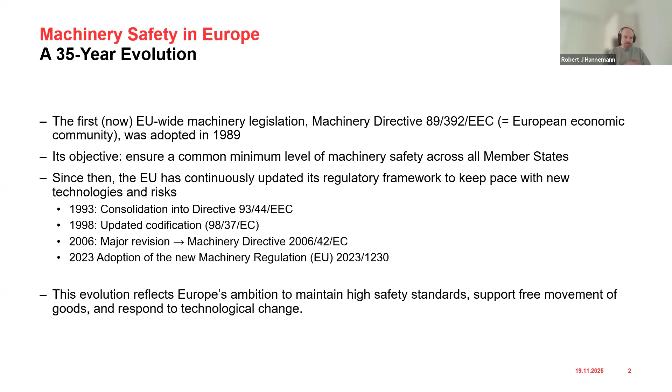We see an impact in the numbers. Since the 1990s, the fatal work accidents significantly got down. So we are in a downward trend since then, even though, of course, the machinery got more complex. The safety standards got up, but on the other side, the complexity of machinery was increasing heavily. I will show you a little later what machinery was like in 2006, but if you look at what has changed in the last 5 or 6 years, you can see that the complexity of our world and the complexity of the economy is way higher than it was.

But still, fatal accidents have been dropping since the 1990s almost continuously. In the last decade, it was declining by 10 to 15%, depending on which numbers you take into account. And this is, of course, one of the main reasons: we have harmonized standards, we have modern standards, they have been revised all the time, they have been adapted, and we have also a higher level of technical documentation. The whole life cycle has been addressed, so machinery has to be safe in the whole life cycle, and still we have 3,000 fatal accidents across the European Union every year. So there's still a lot of things to do.

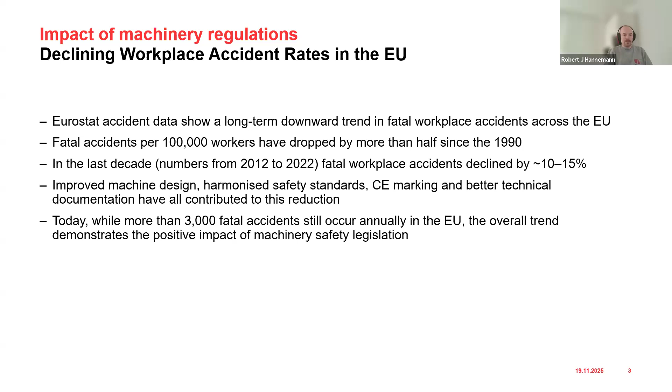And so often we are the ones that get blamed, that processes become more complex, that they cannot work as they used to. But still, our approach is that everybody goes home safe. Maybe they can hate us when they go home, but they go home safe. This is what our job is about, in my opinion. And every life that is saved is one reason why we do what we do and why we love our profession.

So back in 2006, we had machinery, of course, but it was isolated. It was mostly offline, and we didn't have that many safety functions. And software had a very limited influence on safety, basically almost no influence at all. Everything was really isolated and offline. Functional safety as we know it today, so the IEC 61508 and the IEC 61511, they were just released. And as you know, when a standard gets released, until it's really in place, sometimes it's 2 years, sometimes it's 3 or 4 years. So the changes are very slowly going into everything. So in 2003, it was introduced. In 2005, this old machinery directive was basically finished. So there was not that much talking about functional safety as we do it now.

We had no connectivity, we had no mobile apps; basically the iPhone was introduced in 2007. So in 2006, remember what we had? We had very big mobile phones, and they were still getting smaller and not bigger as now. The screens were getting smaller because there was no internet on the phones yet. So the whole world was a completely different one.

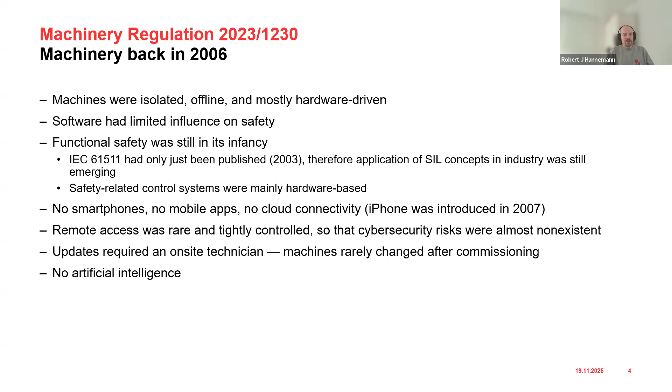Remote access options were tightly controlled, because basically they were non-existent. And cybersecurity for machinery, nobody talked about this. Maybe you were talking about a firewall for your home or for the ERP system of the company, but the machinery was not even connected to the internet. There were no updates, and no updates even necessary. And of course, there was no artificial intelligence. This has all just developed over basically the last 20 years. So this all was taken into account when they said, okay, we need a new legal framework. So we have the old rules, but the old rules.

Sorry, my headphone just restarted.

So the old rules that were applying for all this, they don't make any sense anymore for us now. And we need more options. We need more detail, especially into electrical engineering, into networking. And so they said, okay, we will do a complete new regulation, a new framework. So this was the main core.

Of course, in the meantime, we had some accidents that also had a very big impact. In 2022, a lot of wind turbines in Germany and I think Belgium and the Netherlands were basically spinning out of control because they lost connection to the servers, but they couldn't be stopped anymore. And there was no regulation that said, okay, if your machinery is driven remotely and it loses the connection, it has to go to a safe state. So something like this had a very big impact during the phase of writing this regulation.

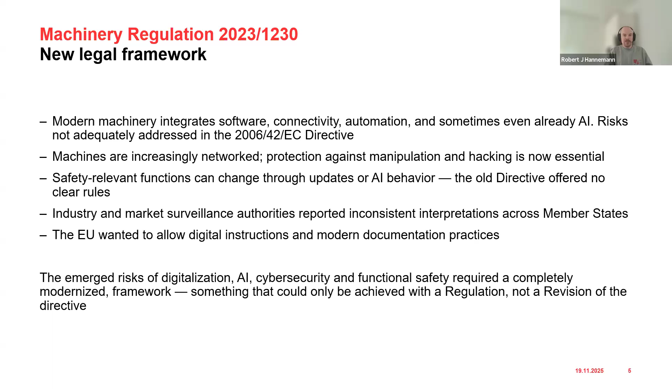And since we know that the technique in automation is changing very rapidly, we needed an approach that also gives the European Union the option to change and adapt very fast. This is why they did basically the regulation instead of a directive. So a regulation is immediately applied.

And every member state of the European Union, and for example Switzerland, which is not a member state of the European Union, we have to adapt to this, and we will take this one into account, and we have to adapt very, very fast also. But there is no vote for the parliaments of the member states anymore. So this will be basically valid from January 2027 on.

But the problem is, since there is the old machinery directive, now we have a regulation and a directive. And what was not possible was an overlap. So the new regulation will be valid in one moment, and up to then it's still the old directive, which also has a very big impact, of course, on the declaration of conformity of everything that is done with the manufacturing process, because all the old rules apply until this day, and from January 20 on, the new rules apply.

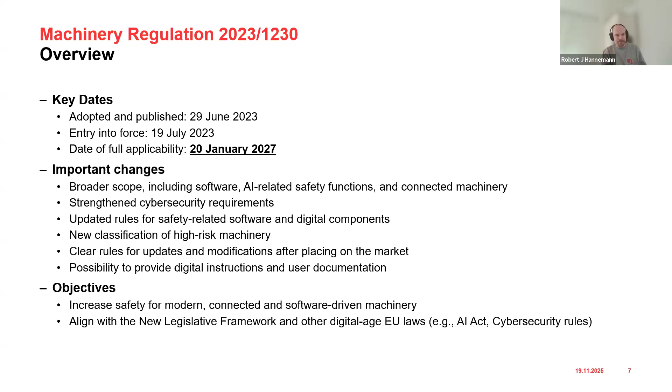So first of all, the definition of machinery stays mostly the same. The definition of machinery is basically mechanical equipment with actuators, control systems, interconnected parts, and at least one moving component. This is the most common one, and this stays exactly the same.

The problem is what was happening before, because there was a very little gap, and of course manufacturers used it, or there was a very big disadvantage for the operators, because if they sent you the full machine without the software, but the software was there on a USB stick, and you put it together, they could sell you the machine as incomplete and the software as incomplete, and you, as the one who connected everything together, were the one responsible for the declaration of conformity and for the whole conformity assessment.

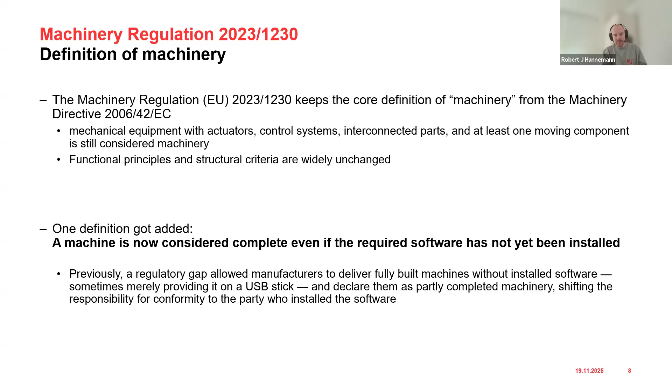And this is not possible anymore, because they added one definition, and so a machine is considered complete even if the required software has not yet been installed, which is very important. And this is one of the key changes inside of the definitions. So the responsibility, even though the software is maybe not on the machine yet, is still with the manufacturer and not with the operator or the one who builds everything up.

Second of all, we have a new approach for safety, or not. It's not completely new. It's improved, let's say it like this. So we still have this 3-step safety principle. So we have the design, technical measures, and then information for the guys who are operating it.

Safety has to be ensured over the whole lifetime of the machinery. So assembly, installation, operation, and so on, to dismantling, but also for partly completed machinery. Because if you had to do with this, you know that partly completed machinery basically just had two paper sheets, and that's basically what it was. Now they have to do a completely new approach, and it's very similar to what they have to do for machinery, but we will see.

So we have a much deeper integration of functional safety now. It is mentioned in the annex basically 20 to 40 times. So it has been adapted now since it was introduced in 2003, and we were working with this, and it was in the standards, yes, but it was not so deeply interconnected with the directive as it is now with the regulation.

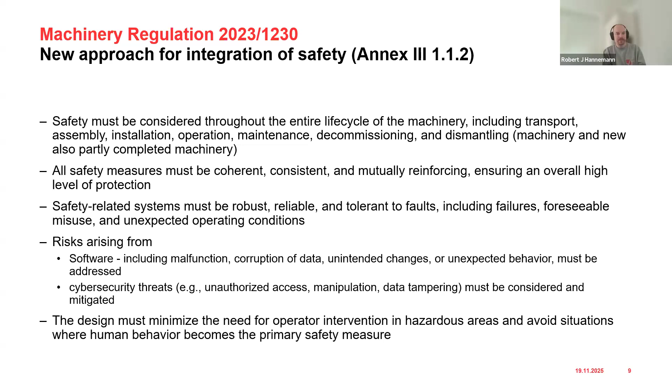What they did, the former Annex 4, this was the dangerous machines.

Sorry, I don't know why it keeps restarting. I think because I don't hear anything anymore.

But the categorization of machinery. So we always had the high class, the machinery which is basically high risk, and the machinery which is no risk or low risk. Basically, it stayed the same. We have new classifications, but this is something that you will hear and see in broader schooling, and you can read this in the directive.

For you, basically important to know is that the list of dangerous machines went from Annex 4 to Annex 1, and it can be changed. Because the directive never could be changed, since every member state basically had their own law for it, it was almost impossible to change the high risk machines. Now they can change it. The Commission can change it. And so if technology is evolving, maybe at some point we can get rid of some of the machines that we now consider as high risk.

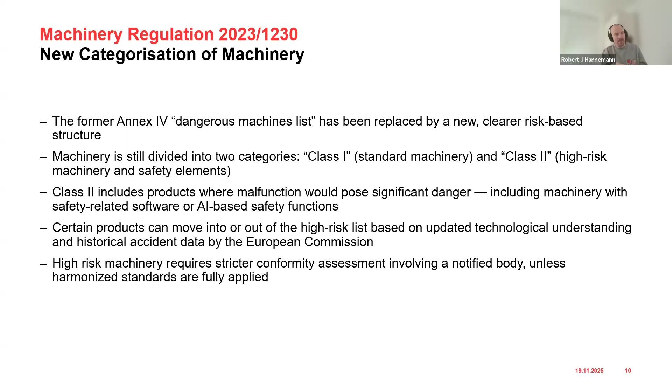And on the other hand, if some new technology comes to the market, we can, if it needs to, integrate it in the high risk machinery, which always needs a notified body or some other third party inside of the certification process.

For partly completed machinery, as I told you already, there are basically the biggest changes. So first of all, when you were building partly completed machinery, it had to be safe, but you could say which requirements of the old directive you did not fulfill. Now, every relevant health and safety requirement has to be fulfilled also for partly completed machinery.

And the manufacturers basically have to do the same technical documentation that they have to do for full machinery, also for partly completed machinery. So there is kind of a manual, there is signing on it. So it still has to be identifiable, because up to 2027, partly completed machinery had not even a type sign nor anything. Or there was at least no obligation to do it.

Now, basically, we have the same requirements for machinery as we have for partly completed machinery. In the end, you have the declaration of incorporation as we always had it, but we can only issue it if it's in complete compliance with Annex 3. So the machine itself has to be safe, and only those requirements that can only be fulfilled at the time the partly completed machinery is incorporated into the final machinery can be taken outside of this assessment.

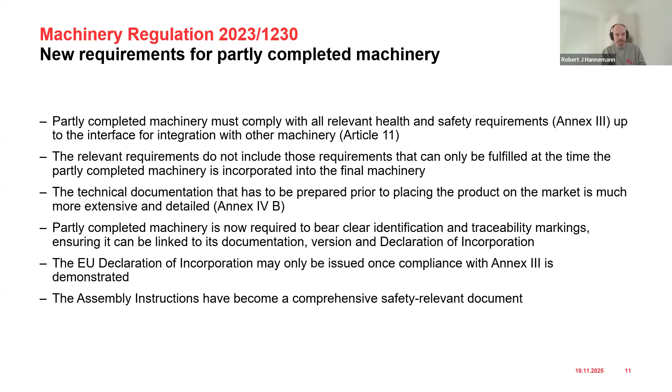For the assembly instructions, we have very, very big changes, as I said, because now it becomes more like a manual. It has to describe, of course, the conditions, how it is built into another machinery. But on the other side, it has to contain information that is relevant for the final machine's documentation and manual. So you have to tell also how to operate this whole thing when it's built in the final machinery where it was supposed to be in. Also, the instructions have to cover foreseeable misuse, transport handling, noise, vibration, like it is for full machinery.

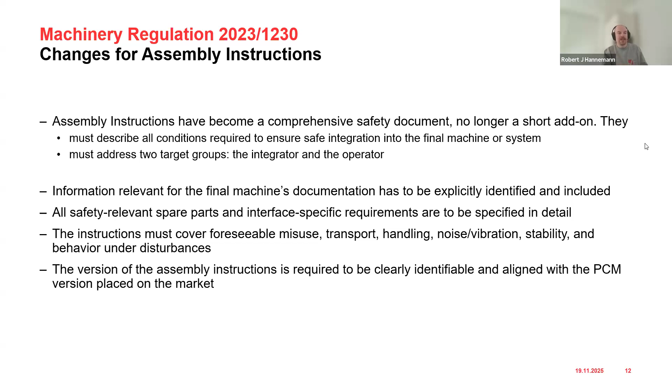Also, a very, very big and important change, especially for EHS, is the substantial modification. You know that machinery placed on the market that you were operating for years, at some point you have to modify it. Maybe the scope of the machine changed, or you have to increase the safety, or you need it for a completely different thing. And it was never clear when the declaration of conformity of the manufacturer is really taken out of place. It's not valid anymore because the change is so big that you become the manufacturer of the new machine.

Now we have a clear definition. I won't read it to you, but this is the clear definition that it gives to you. And it gives us basically the chance, and I know that the standards for this are already in development, so we will also have harmonized standards telling us what to do and how to see if there is a substantial modification or not. So for the operating side, this is a very, very good change.

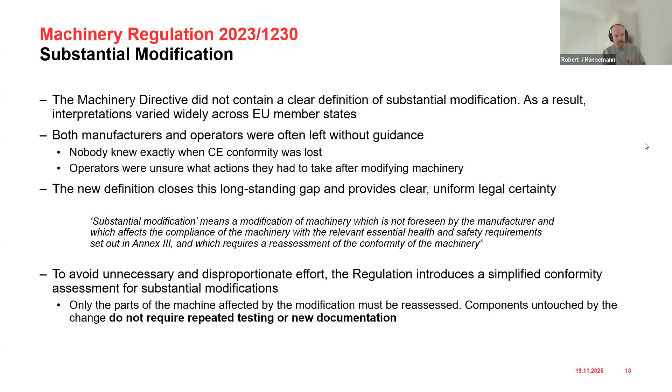And what's really important, and this is where I even made it bold. If you changed something and it was a substantial modification, you always had to do the complete assessment for the complete old machinery. So basically you became the manufacturer of the old machinery, including the changes. Now they said, okay, components untouched by the change do not require repeated testing or new documentation. So they remain in their old conformity, and you just have to assess the changes that you did.

One of the big parts, or the most discussed part, of course, is this protection against corruption, which basically means that cybersecurity is directly tied to machinery safety and to the machinery regulation. Updates that you do have to be secure and are not allowed to introduce new risk to the machine. If there are corruption attempts, machines have to enter a safe state. So they have to recognize that there is a corruption or a hacking attempt, and put themselves in a safe state so nobody can get hurt and there is no possible loss of control, for example, for the machine or for the operator.

As I already said, if the remote connection is lost and the machine is operated remotely, it also has to go to a safe state. This was basically the reaction to the almost collapse of the energy market in 2022. So the protection against corruption is a very, very big topic, but this is the only topic where we have no standards yet. We have no standards for cybersecurity because this is all still in development and will be released somewhere in 2026 to 2027.

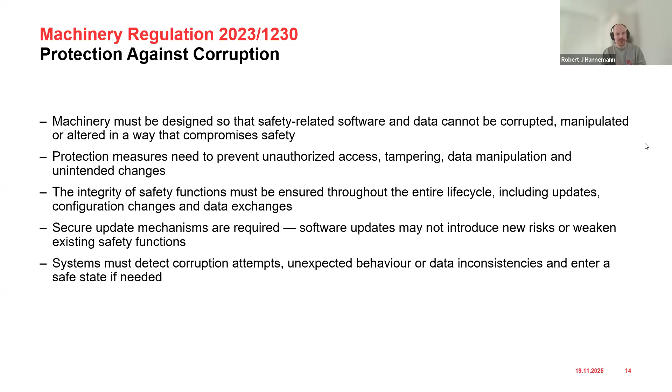The other thing, of course, is AI and self-learning systems in machinery. ChatGPT and Grok, and I don't know how all these new tools have been called, but we use them. Many use them on a daily basis, and also, of course, the machines use them. When machines are built to learn from their own behavior, to increase productivity, to increase everything that they do.

And this is wanted by the market, but still it has to be safe. So the machinery is not allowed to learn something that undermines the safety. So basically, if you read the whole article, it's about not getting Skynet, even if it's just for machinery. It's not possible for a machine to learn something that will make the machine unsafer in its operation. Also, if you update the software, it's not allowed to have new risk. So even AI-driven machinery often, not always, but often will fall into class 2 of the machinery.

So high risk machinery. I think in 5 to 10 seconds my headphone will restart. But then you will just see it.

But I will continue. So the notified body at least can know that there is something going on. Of course, also the documentation has to be more detailed, because everybody has to know what this machine is learning and how it is learning. And human oversight of everything is

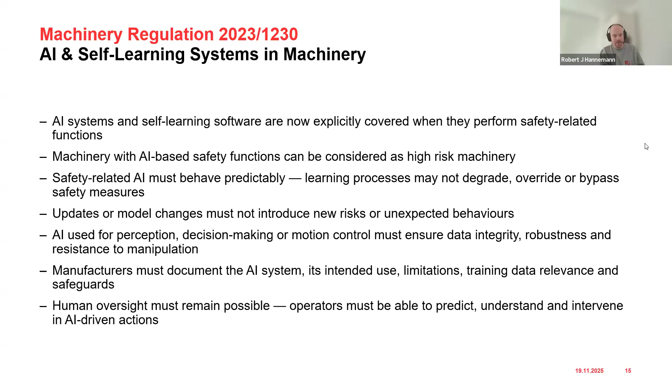One very good change also is the change to digital documentation. Manufacturers were not allowed yet to sell you a machine and not give you a paper copy of the technical file, which led, if you have very interconnected machinery, turbines or something like this, to basically 60,000 pages of paper they had to deliver. Now it's fully permitted to just give you a link, a QR code, or a USB stick with the technical documentation. And we assume this will become standard very fast. The moment they are allowed to do it, they will do it.

And for us on the other side, it's also much more convenient, because you can search through these documents, so you can work with them much more easily than with paper documents. Of course, if you request a paper version, you are always allowed to get one, free of charge, but you have to request it when you buy the machine. So this is the only thing. You cannot come in after 6 years and want a paper copy. You have to do it in the moment you buy the machine.

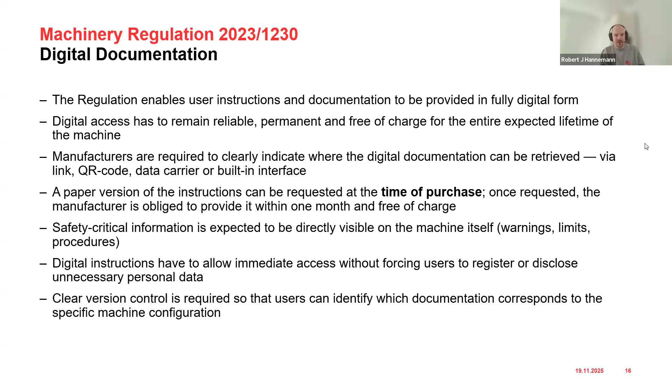And the problem for the manufacturers will be that the links on the machinery, the QR codes, everything that gets you access to this, is not allowed to change for at least the 10 years that are still the time limit to give you everything. So for 10 years, they are not allowed to change the websites for the manuals and the technical documentation. And what's very convenient for us as users, it's forbidden to require unnecessary data collection or user accounts to get to these documents that are somewhere in the cloud.

What are the big achievements of this whole machinery regulation? We now have a changeable standard, so we can adapt to new developments inside the industry very fast. We have connected and software-driven machinery inside the scope. We have closed some long-standing legal gaps. And of course, we have a higher level of protection for users, operators, and society.

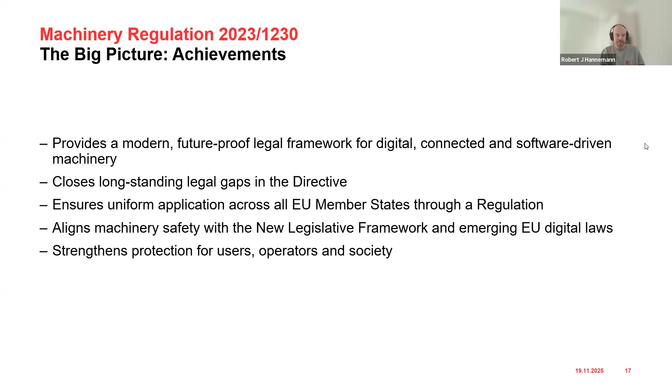What do we have to prepare for? We have, of course, higher safety obligations, especially for the guys who are building and selling machines. Everything is inside the scope, even updates. We have higher expectations for partly completed machinery.

We can expect digital documentation, and we will have a big trouble in the industry because of the hard cut in January 2027. So what you need to know: if somebody now sells you a machine with already the EU declaration of conformity according to the new machinery regulation, for example, it's not valid. This whole thing is not in place yet. They still have to sell it to you with the old conformity. So this hard cut, this will be very interesting.

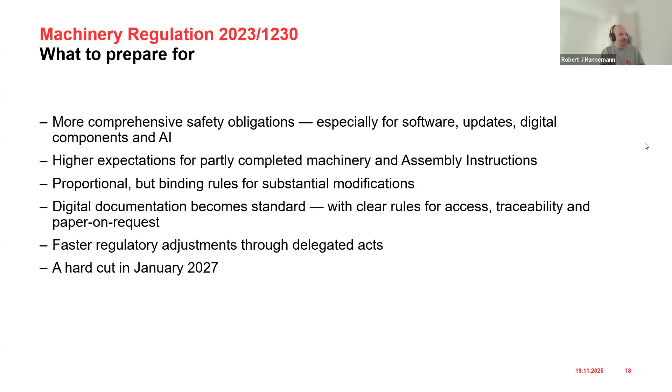So for you, prepare for it and try to prepare your companies for it, so that we can maybe have a very quiet day on the 20th of January and not a chaotic one. And basically this has been everything from my side. And of course, now I'm open for questions.

Wonderful. Thank you for that, Robert. Very interesting, very insightful changes that are coming our way in January 2027. So yeah, we have a few questions I may pose to you before we wrap up this webinar.